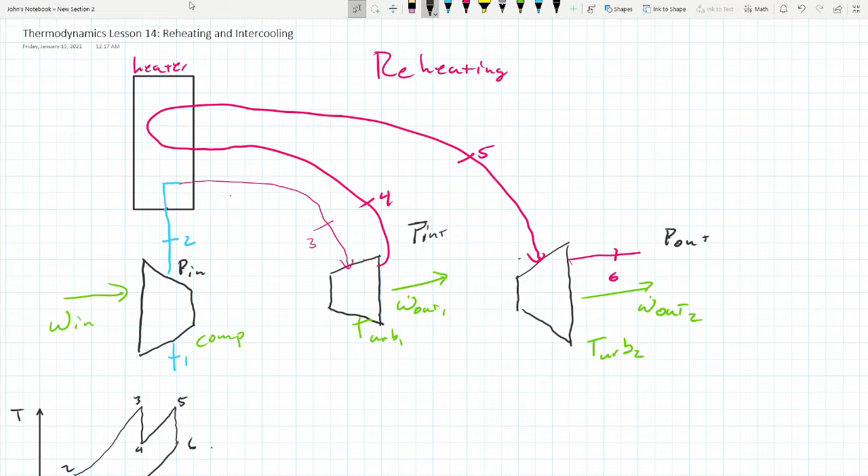The goal of this heating cycle can be to increase the temperature, for example, of state point 5, this is the state point right before it goes back into the turbine, to the same temperature as the initial state before the first turbine.

But what it does is it increases the efficiency of your system because you're able to get more work out of the cycle. And this type of part you have to be careful with, because when you use reheating, you're also adding additional heat.

So there's a fine line you walk between doing too much reheating. You're getting a lot of work, but now you're decreasing the efficiency of your system because you're adding so much more heat. That's not quite right either—you're able to get more work out than you would normally by just having one heating cycle.

So if you recall, the work you get out of a cycle is the area underneath the curve. If I were to just do the original cycle, this is the amount of work I would get out, this area.

However, by adding the reheating part of it, I get all this additional work here out of my cycle. So now I'm able to get more power generation. But again, you're walking a fine line between being inefficient and being very efficient. So you just got to be careful.

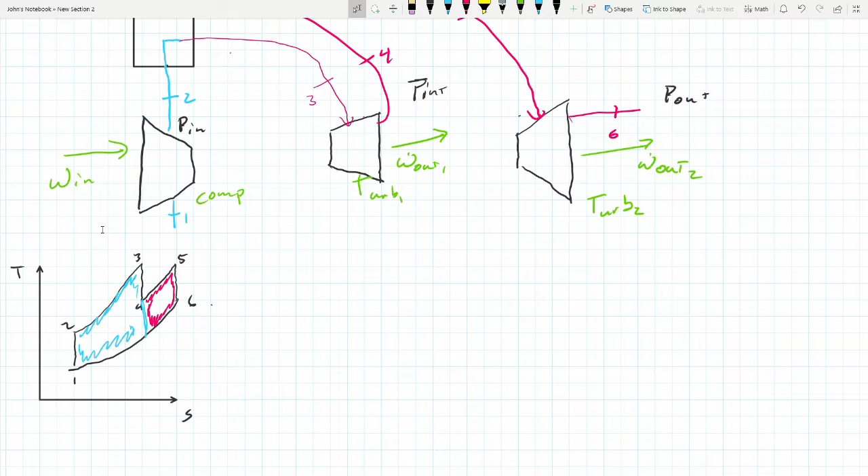Same thing is also going to result from intercooling, but we'll cover that in the second half of this video. So first we're going to solve a problem. Let's write the state points out.

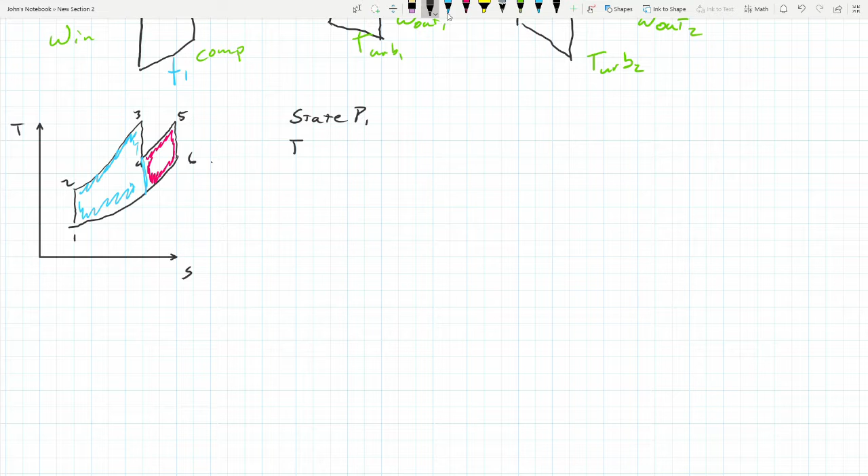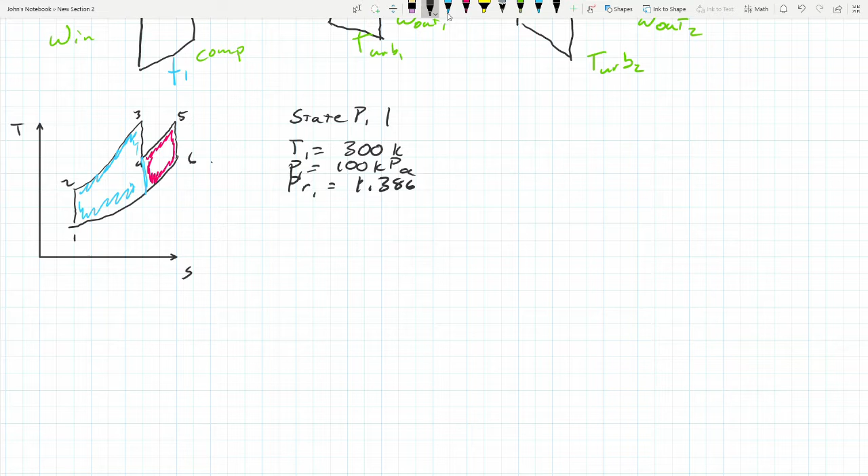State point 1: T1 is equal to 300 Kelvin. P1 is equal to 100 kilopascals. PR1 is equal to 1.386. H1 is equal to 300 kilojoules per kilogram.

State point 2: we're given that P2 is going to be 1,000 kilopascals. PR2, because it's 10 times more, is going to be 13.86. Go to the table, you can get that H2 is equal to 580 kilojoules per kilogram. Again, we're doing P1 over P2 is equal to PR1 over PR2.

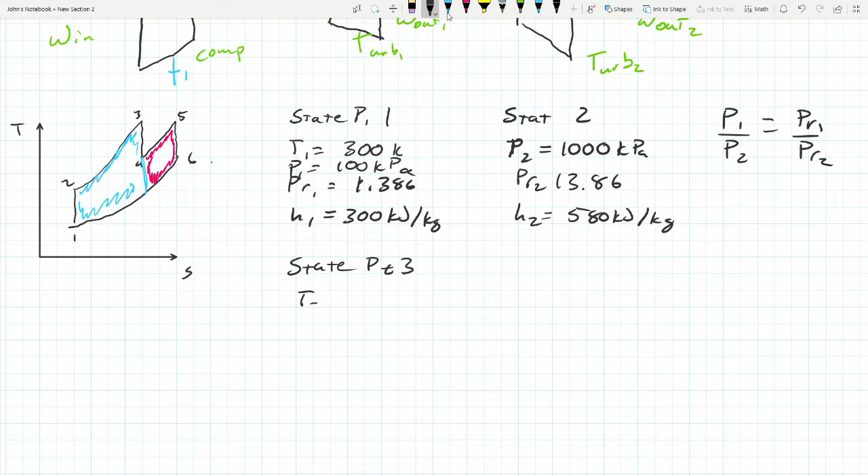So let's do state point 3. We're going to heat the system up to 1400 Kelvin. Our pressure going into the first turbine is 1000 kilopascals. Our PR3 is 450, and our H3 is 1515 kilojoules per kilogram.

State point 4: at this point we are leaving this first turbine, we are right here. We are told in the problem that P4 is equal to 300 kilopascals.

So if we end up solving for PR4 over PR3 is equal to P4 over P3, we get that PR4 is equal to 135.15, and that H4 is 1096 kilojoules per kilogram.

So then let's go to state point 5. We're going to run under the assumption for this example that the gas after it leaves the first turbine is reheated again back to the original temperature at state point 3.

If I'm going fast through this section, don't worry, no math is being done right now—I'm just writing down the state point values, since we've already covered how to do it. What lesson are we on? 14, so probably about 3 or 4 times by now—actually probably back at diesel, lesson 9, so maybe 5 times. But once I write the state points down, we'll slow down.

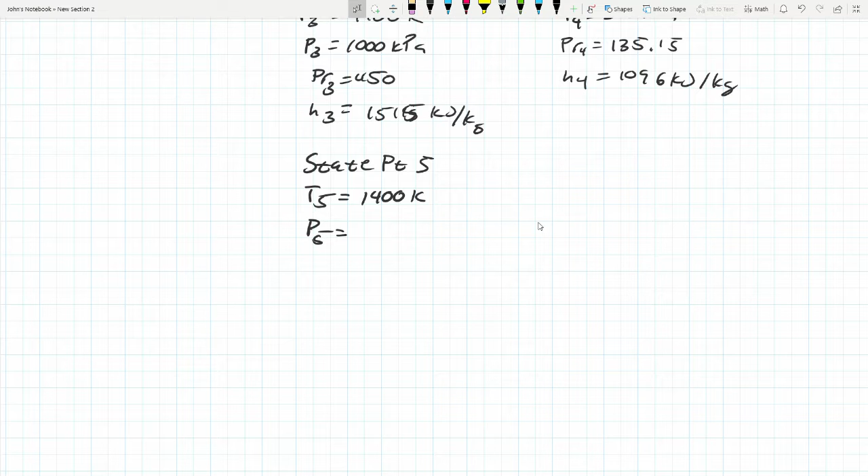So T5 equals 1400 Kelvin. P5 is equal to 300 kilopascals, because remember, there's no compressor here—what leaves the turbine is being heated again and then pumped into the second turbine. At this new temperature, we look up PR5, which is 450, H5, which is 1515 kilojoules per kilogram.

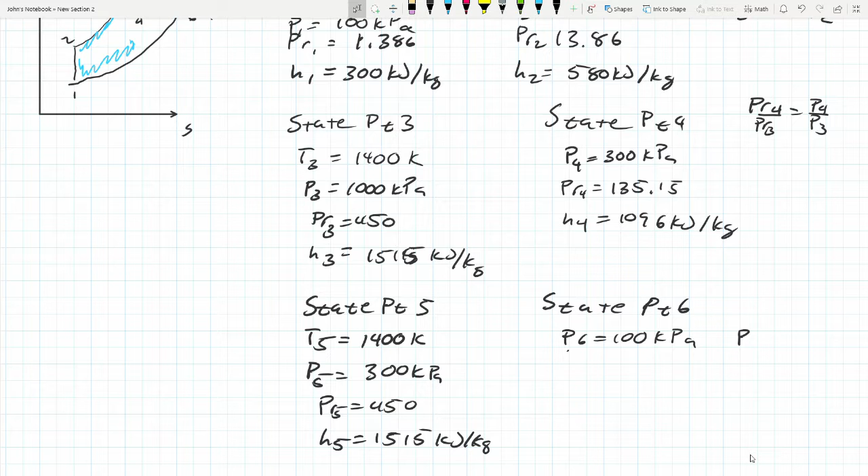State point 6: now we're ejecting into the atmosphere, so P6 is equal to 100 kilopascals. By doing the same PR6 over PR5 calculation like the ones we've done before, we get that PR6 is PR5 over 3.

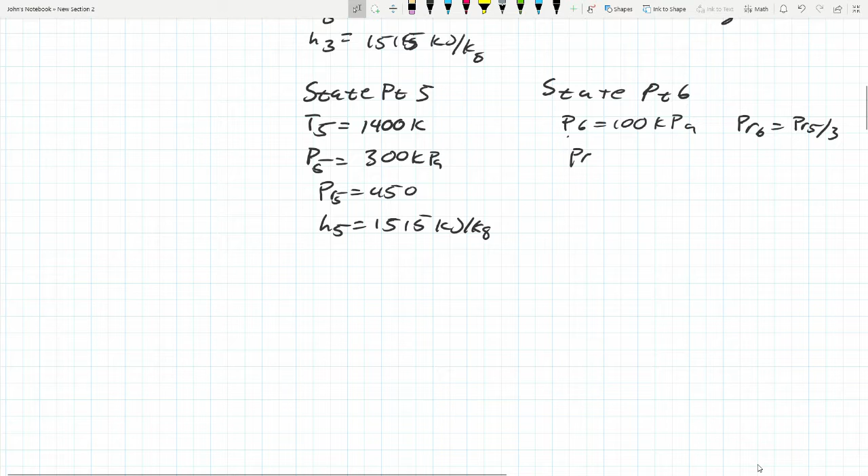Which gets you 150. And H6 is 1127 kilojoules per kilogram. Okay, these are the state points.

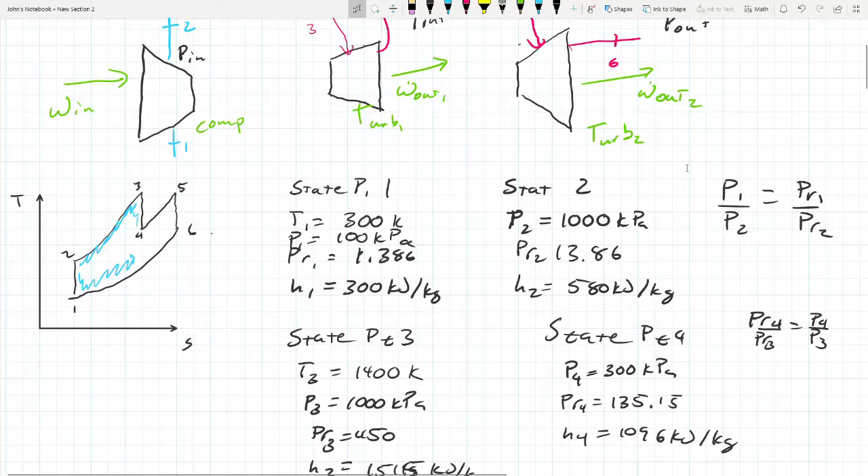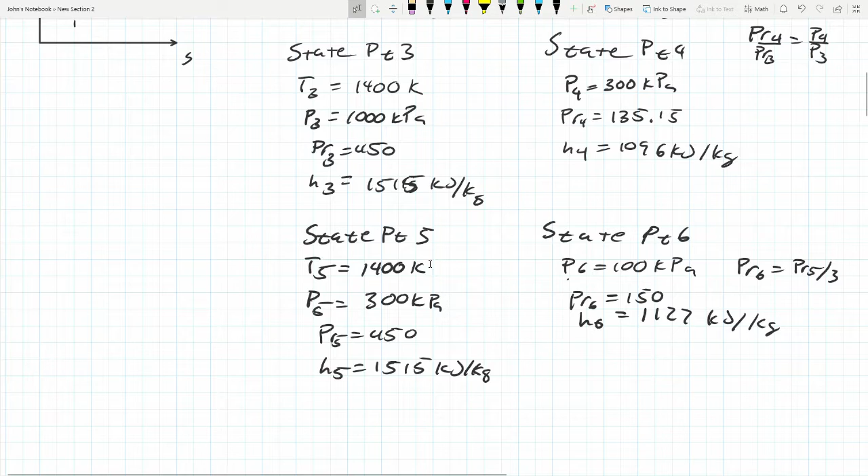So, to reiterate, we're doing a reheating cycle. Here we have the air coming in from the atmosphere, going through the compressor to get to 1000 kilopascals. It is then pumped through a heating element, which heats it up to 1400 Kelvin. We put the air into the first turbine. It leaves at 300 kilopascals. It is reheated again and heated up to 1400 Kelvin again, then sent back through the second turbine where it leaves into basic atmospheric pressure. And you'll get the extra work out because you're dealing with a second turbine.

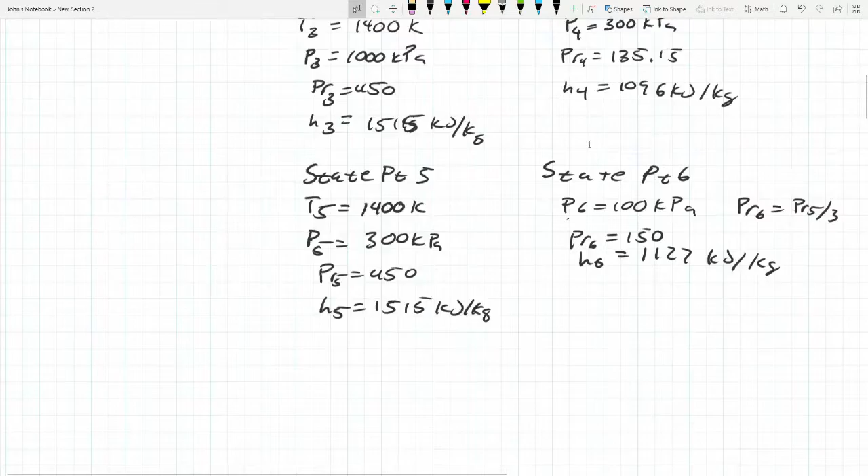So, how do you analyze the efficiency of this cycle? Well, you analyze it the exact same way you analyze the efficiency of any other cycle. Efficiency is equal to work of cycle over Q in.

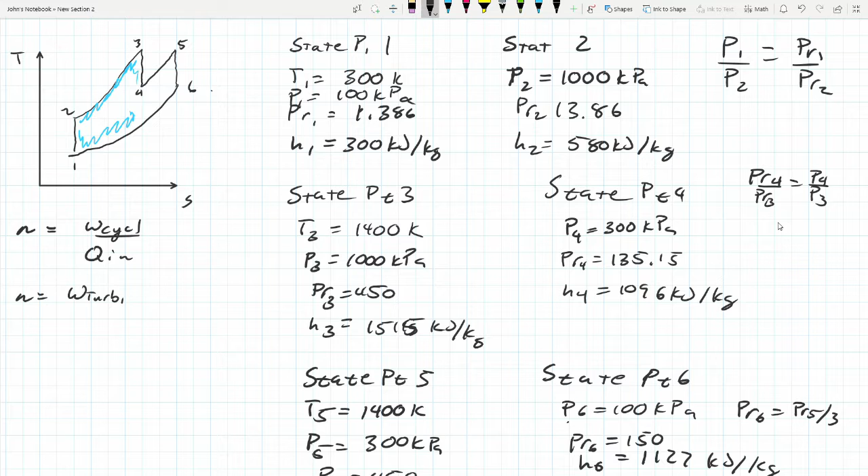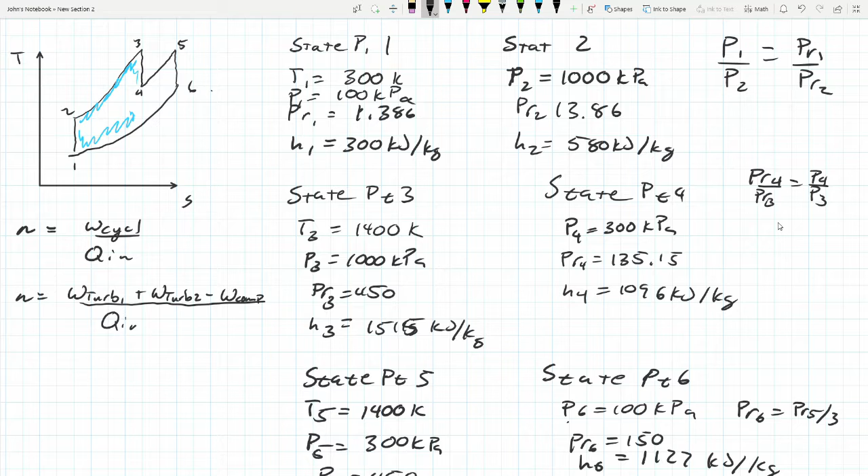Efficiency is equal to work turbine 1 plus work turbine 2 minus work of the compressor, all over the Q in of the first heating element plus the Q in of the second heating element. So heating, first instance from 2 to 3, second instance from 4 to 5. Using the first law, like we've done multiple times before, you end up with H3 minus H4 plus H5 minus H6 minus H2 minus H1, all over H3 minus H2 plus H5 minus H4.

Alright, so we have our numbers, let's plug it in. So what is the efficiency for this system? Well it would be 1515 minus 1096 plus 1515 minus 1127 minus H2 minus H1, which is 580 minus 300, all over H3 minus H2, which would be 1515 minus 580 plus 1515 minus 1096. Your efficiency that you get out would be...

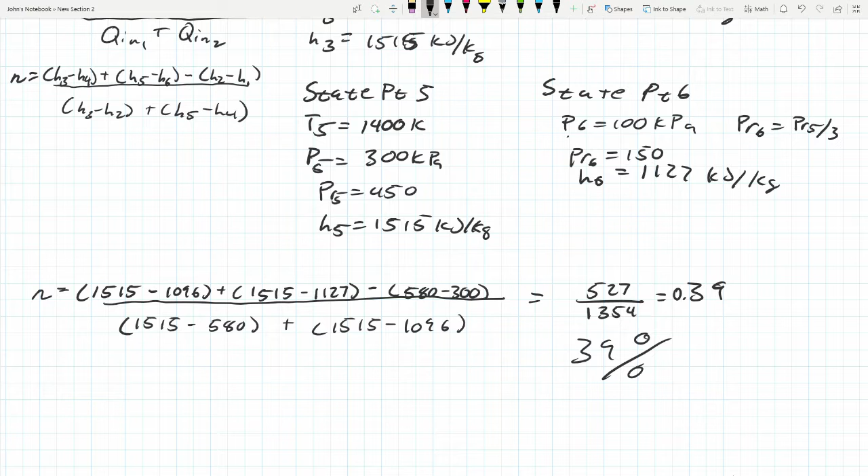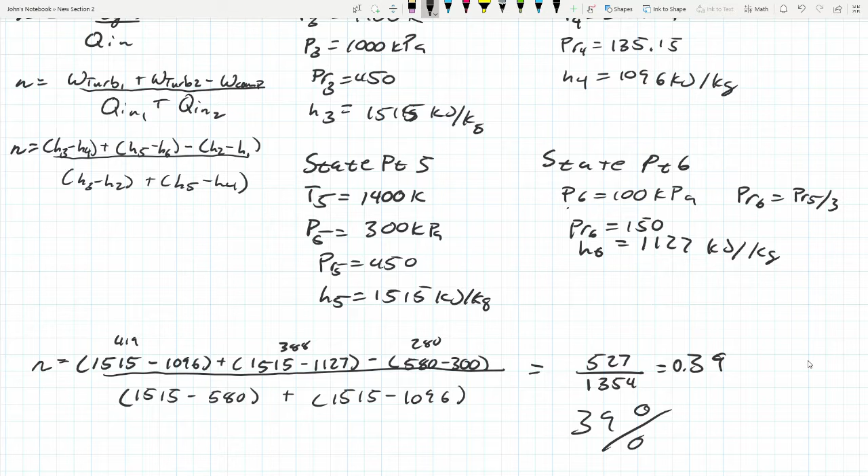Alright, well that's not great efficiency. This cycle should be improved very much. In fact, I'm going to go make sure I didn't type the numbers wrong into the calculator real quick. So... no, alright, 39% efficient.

So this is reheating. It's just the exhaust from a turbine being reheated again and pumped through a second turbine. You'd analyze it the exact same way you've analyzed any other type of problem dealt with open systems. One thing you'll notice about thermodynamics courses, however it's split up, when you're analyzing a cycle, it's the same. If you know the first law, you can basically do anything inside of thermodynamics, analyzing any type of system just by knowing the first law. Now, the other laws are important, of course, and you do need them, but if you have a good understanding of the first law, you can do any problem.

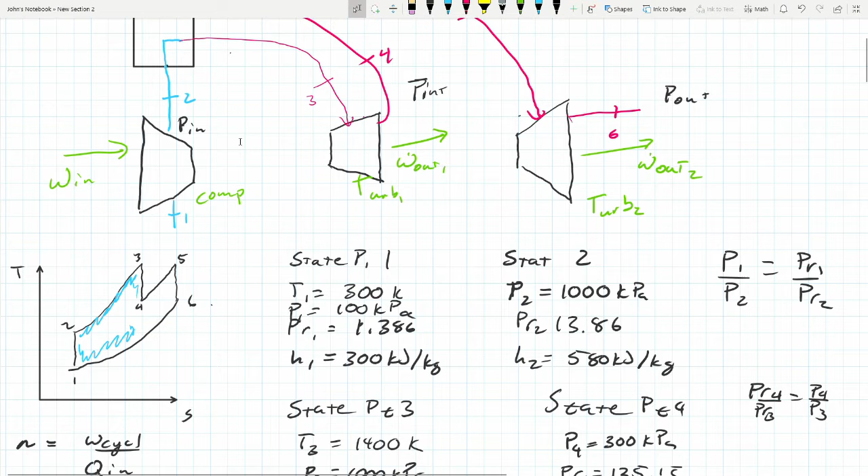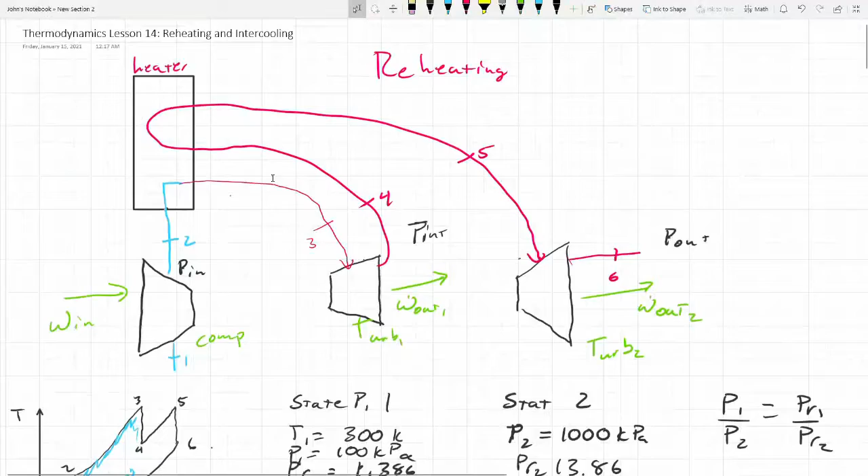Alright, so this is intercooling. What intercooling is: normally when you have a process, such as this process up here, you have a compressor that will draw in the air, compress it, and then you heat it up. Well, what intercooling is, it involves two compressors. So the first compressor draws in the air, then the air is cooled down, and then it is compressed further in the second compressor, and then heated.

But again, this would walk the fine line of if you're adding too many compressors and doing too much intercooling, you're putting more work into the system, and so you're going to decrease the efficiency of the system, because even though you will get more work out, if you have to pump in more work, you can decrease the efficiency because it's the work you get out of the system minus the work you put into the system, all divided by the heat you add.

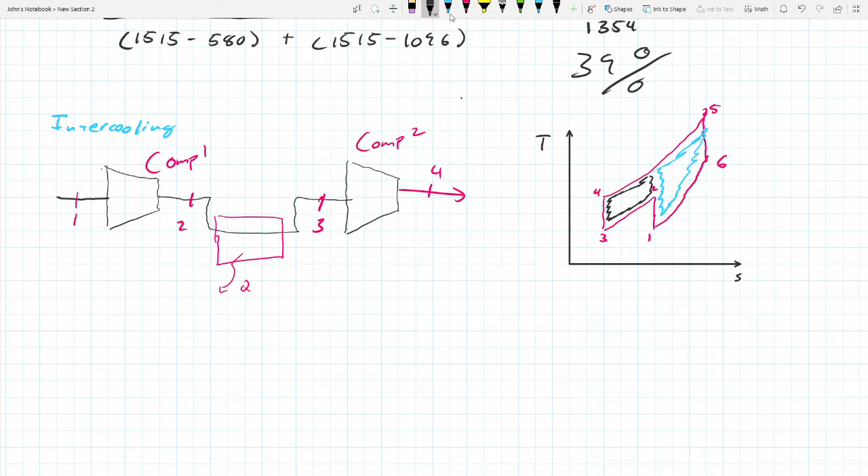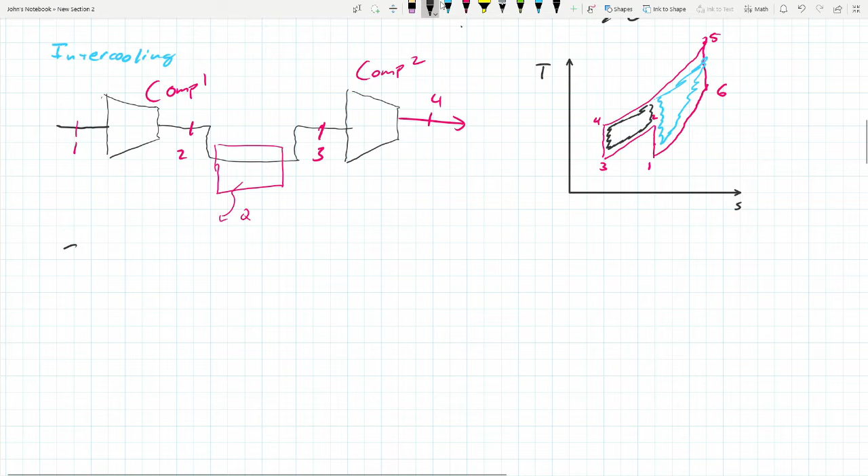So now how would we analyze this? Let's do a quick state point thing just to show you how it's done. I'll write the efficiency for this, and then I will cover why intercooling and reheating are being covered in the same lesson. So, state point 1, standard, T1 is 300 Kelvin, P1 is 100 kilopascals, PR1 is 1.385, H1 is 300 kilojoules per kilogram.

Okay, so what about state point 2? Well, state point 2 is pressurized to 300 kilopascals.

So then if you do the P1 over the standard pressure calculation, you will get that PR2 is 4.155, just to be checked. And you get T2 is 410 Kelvin, and H2 is 411 kilojoules per kilogram.

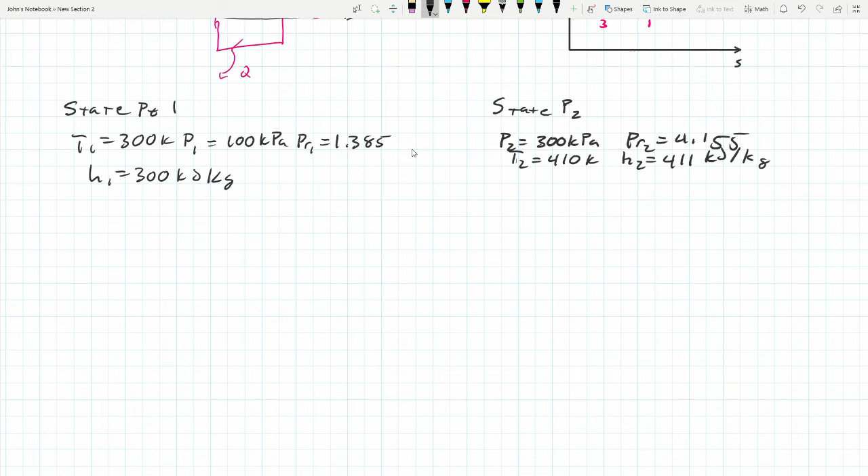Alright, now I'm cooling it down again. So when I'm doing the intercooling, I'm cooling it back down to atmospheric temperature. So at state point 3, I am at 300 Kelvin. H3 is 300 kilojoules per kilogram. And PR3 is 1.385.

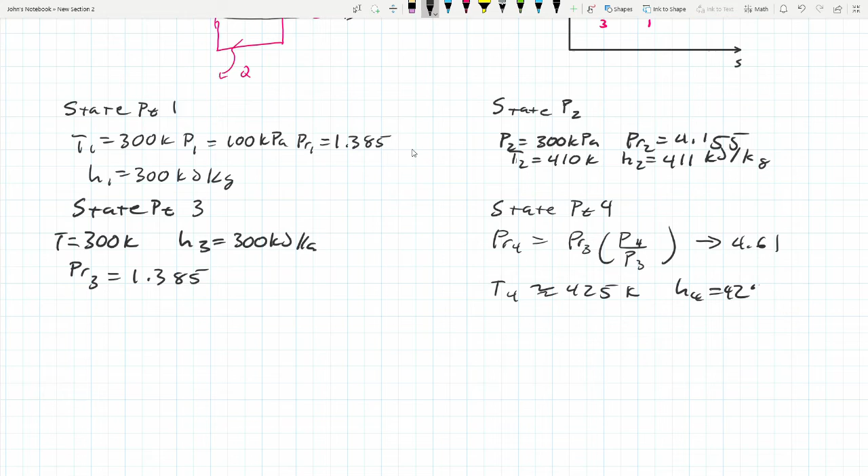Okay, then let's do state point 4. PR4 is, again, equal to PR3 times P4 over P3, which would get you 4.61, which means T4 is about 425 Kelvin, and H4 is about 425 kilojoules per kilogram.

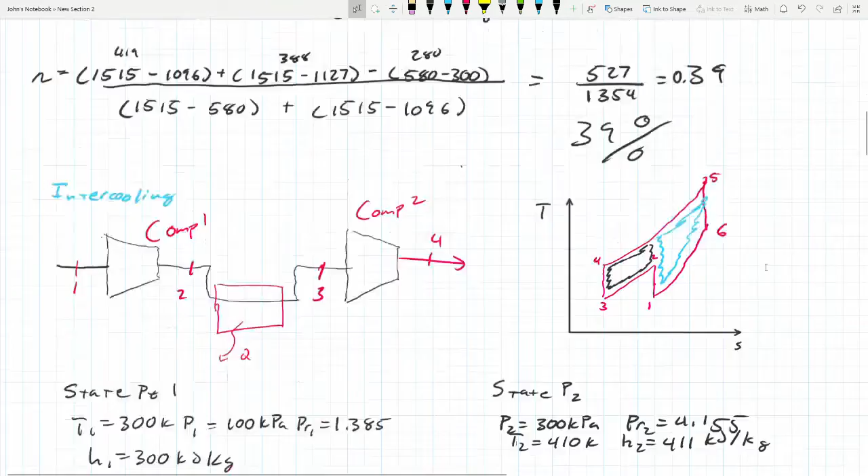Alright, and so just for this turbine, we'll say state point 5, T5 is 1400 Kelvin, and the values are up here. If you need it, you can just simply rewind the video. And state point 6, atmospheric.

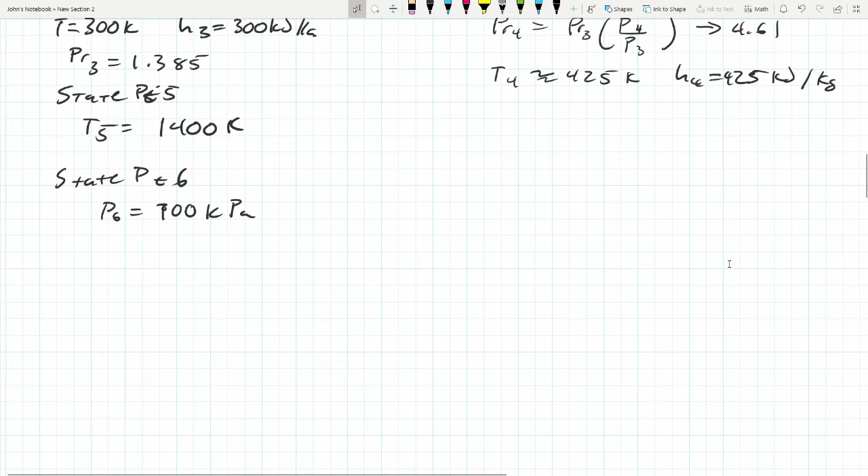Now, with all these state points, we're not going to solve a problem like this because we have solved these types of problems so many times. The point right now is just to explain the concept, because if I were to solve this problem, you're just going to get the exact same thing up here.

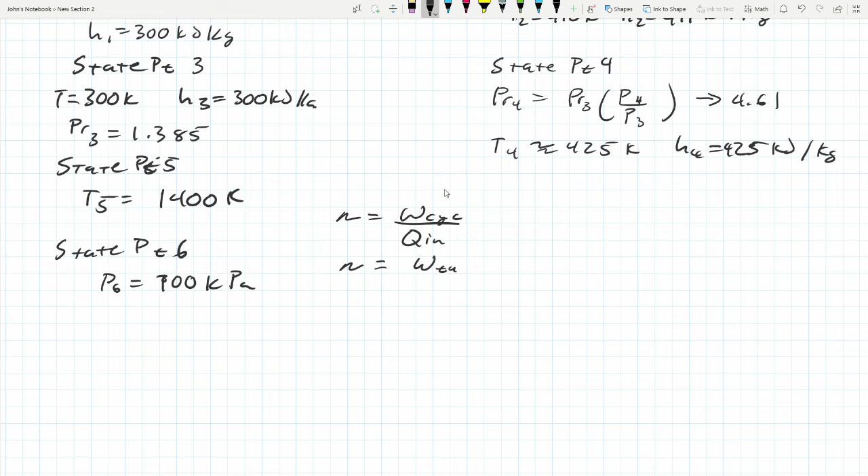So I'll write the efficiency equation for you. Remember, efficiency is equal to the work of the cycle over the Q in. Well, the work of the cycle is the work of the turbine minus the work of compressor 1, minus the work of compressor 2, all over the amount of heat you pumped into the system. So, standard, do the math between, get your enthalpies of each state point, plug it into the equation, you can get your efficiency.

So again, what intercooling is: I have a first compressor that's pressurizing the air, then since you're pressurizing something, it heats up. I am cooling it back down, and then I'm pressurizing it again. This allows me to get the gas to a higher pressure and allow me to get more work out of the system when the air goes through the turbines.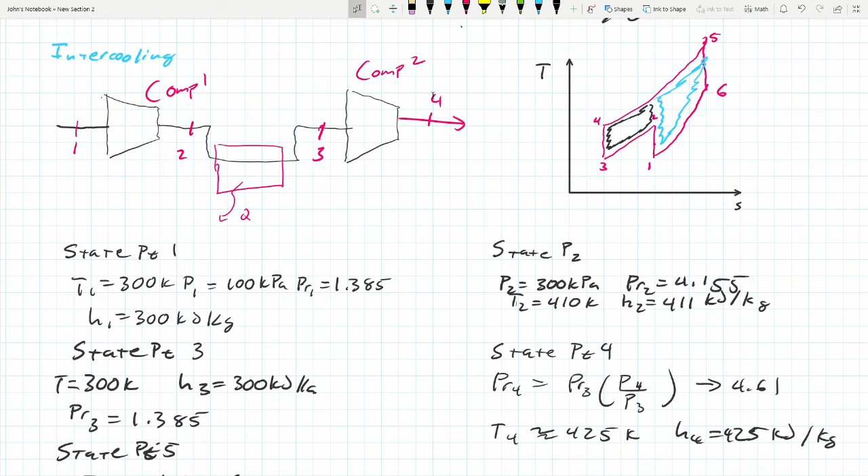Now, you might be asking yourself, there's a reason I am covering reheating and intercooling in the same lecture. It's because they both increase the amount of work you can get out of a system. Well, what happens if you combine them? I'll show you what happens.

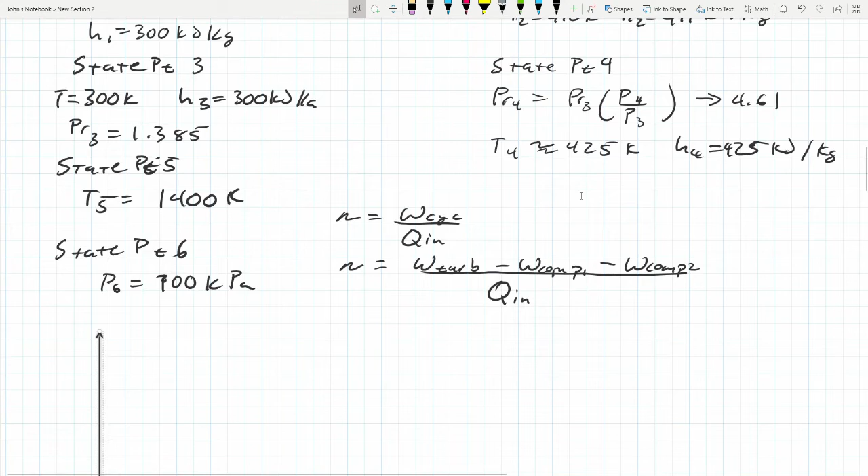So if I have a plot here, we're not going to solve a problem, because again, it's finding the enthalpies at each state point, plug it into the efficiency equation, you're done. But what we get, if say we were to have multiple stages of intercooling, is you just get this zigzag. And then if I were to have multiple stages of reheating, I would also get this zigzag up top.

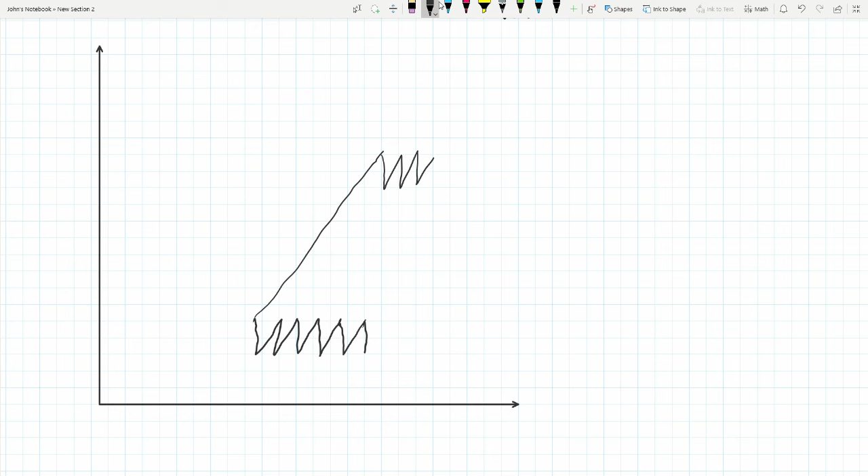So this process, where this would have been the normal work I would have gotten, I'm now able to get all this extra work up here and here. So I'm able to increase the work I get from my system.

But again, you have to be very, very careful when you're including intercooling and reheating, because you might end up heavily decreasing the efficiency of your system because you're pumping more heat in and you're requiring more work to be put into the system for it to get more work out. So it's a fine line. I've had it before on some of my projects where the difference was literally adding or removing one reheater and one intercooling, and my efficiency could fluctuate by about 10%. So you just have to be very, very careful.

This is our second to last video. Our next video will be on the Rankine cycle and combined Rankine and Brayton cycles. And then that'll be our last video on thermodynamics. That will be uploaded either sometime next week, either Tuesday or Wednesday. And then fluid mechanics is done as far as I know. If there's other topics that I see fit needed to be added, I shall add them. But our next main topic will be vibrational mechanics, and I will include some material science as well.